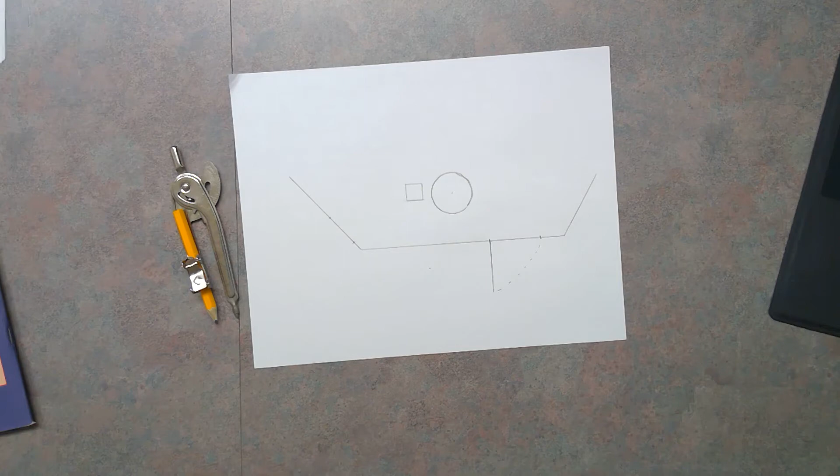All right, guys, I'm going to show you how to change your floor plan into a front view. So I'm going to go through really quick, just measure these things out. So I'm going to say that my wall is a 12-foot wall. You are going to draw this prettier than I am. This is just so that we can get through this video a little bit quicker.

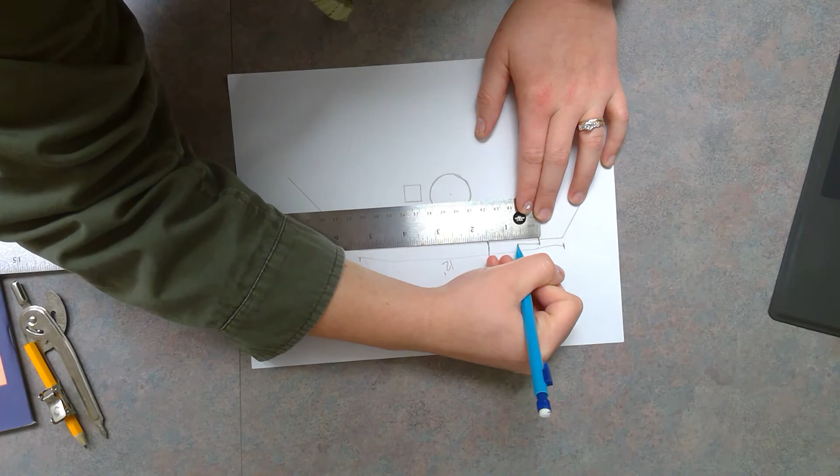Then my door is a 3-foot door. This wall is a 4-foot wall. Remember, I'm using 1/2-inch scale, so I'm doubling all my measurements. This wall is a 6-foot wall.

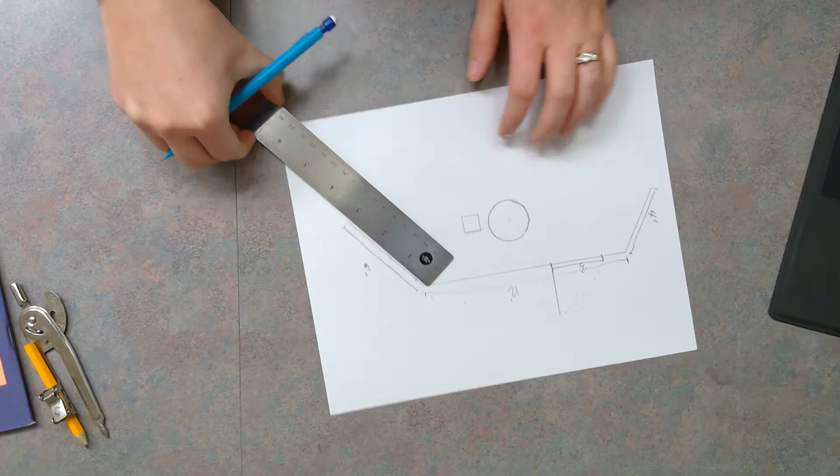This chair has a 1-foot measurement on each side. I know that because I just measured it. And my table, I'm going to round it a little bit, but I'm going to say that this is a 2-foot table, just to make it easy.

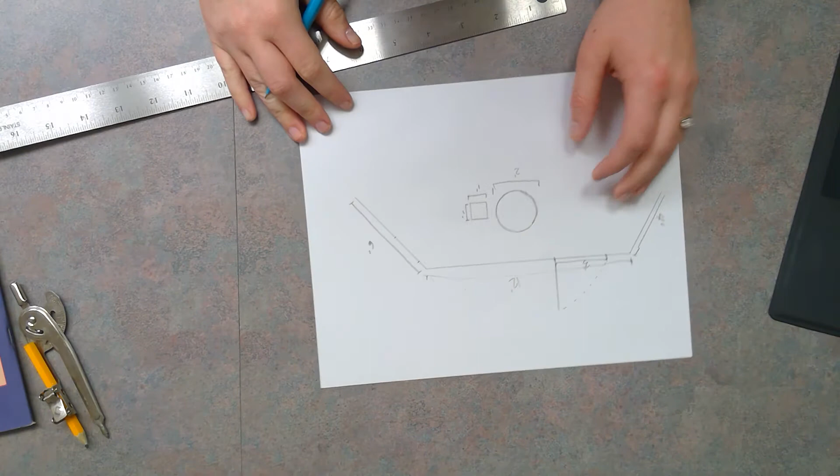So now that I have all of my measurements on this drawing, don't forget you're going to label your door too, but we already know that it's 3 feet. You are going to use these measurements to draw your front view. So you're always going to start with your back wall every single time. So on my front view, I've got a 12-foot wall, so I would just go towards the bottom of my paper and I would draw a 6-inch line.

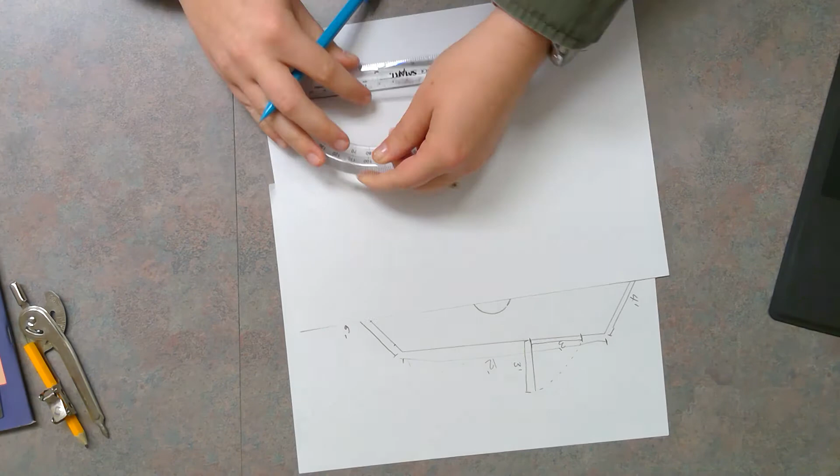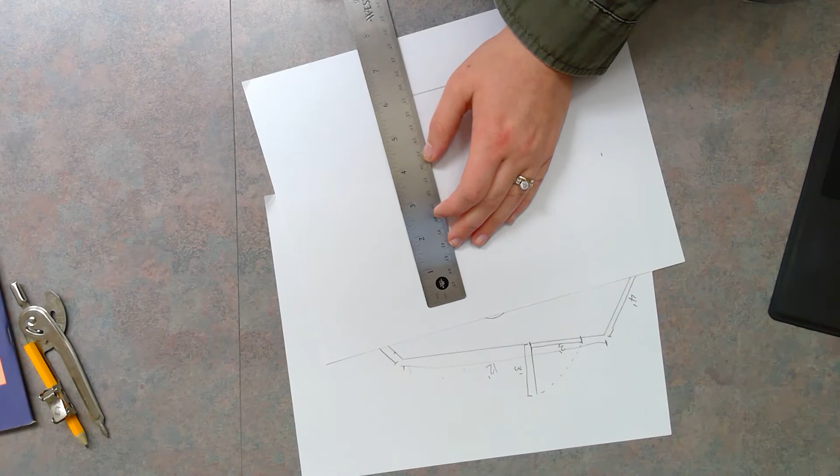Then I would use my protractor so that I could decide how tall I wanted this wall. I want it to be 90 degrees though, so I'm going to make my marks. 90-degree marks. Then I would want my wall to be, let's say, a 12-foot wall. So I would bring my 6 inches, because I'm doubling it, remember, 1/2-inch scale, and I would draw on either side. And this would be my 12-foot wall. So because my wall is 12 foot by 12 foot, this is going to end up being a square.

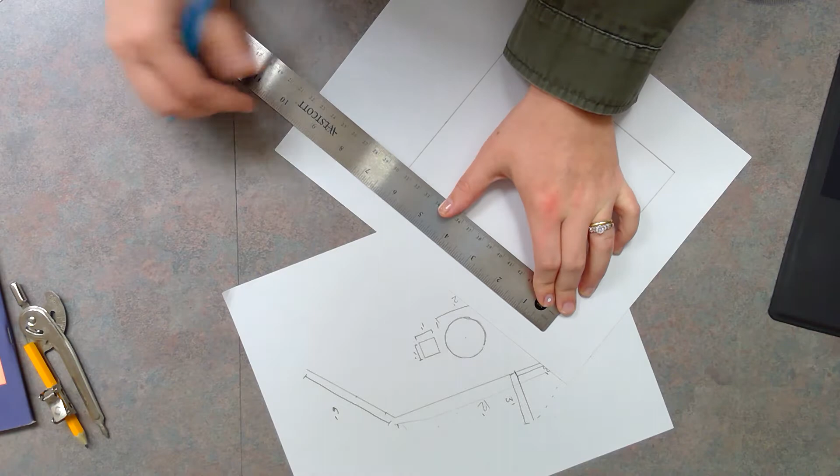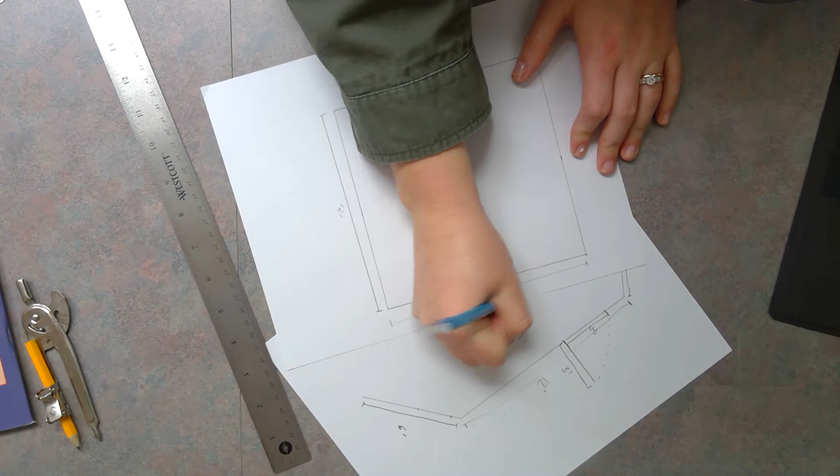Then I would label both of these. Remember, you're going to make it prettier than I am. I'm just going to go a little bit quick. 12 foot. 12 foot. Now, here comes a little bit of the tricky part. You always want to add anything that's on your back wall first. So the only thing that's on mine would be this door right here.

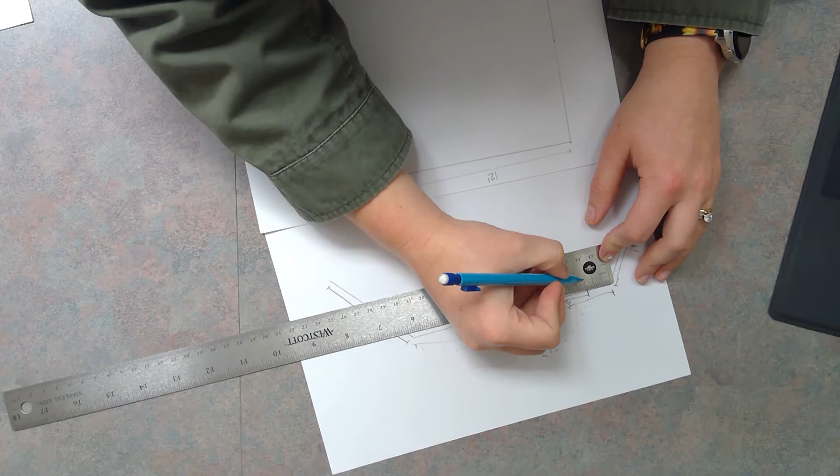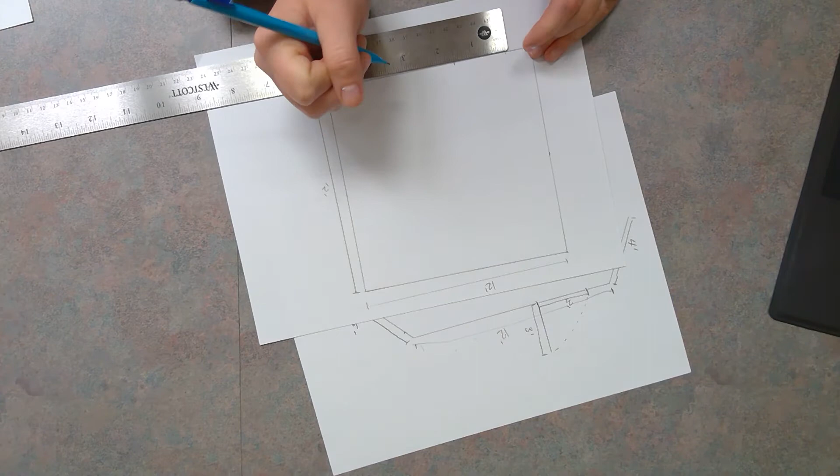And so on this door, I would measure from the side of this corner, so right here, and I would say that marks at my 3/4 inch mark. So I'm going to measure the same thing over here. I'm going to put a little mark. And I know that my door is 3 feet wide, so I'm going to put a mark at my 1.5 inch point. Now that I have my length figured out, I have to figure out how tall I want it to be. So I'm going to make my door a 6-foot door. And so I would just bring it here.

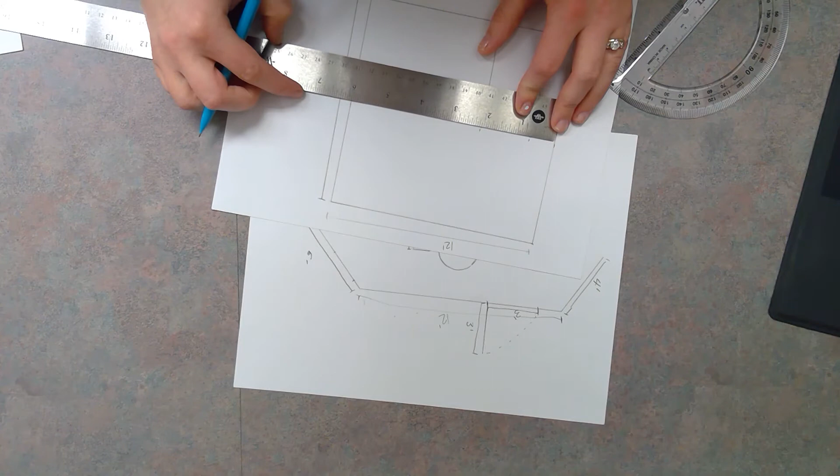Actually, I would use my protractor first, so I get the 90 degrees. 90 degrees. Then I would measure up 6 feet, which is 3 inches. Notice how I am kind of cutting a little bit of corners because I'm not actually connecting my dots. I'm just drawing up the 3 inches. You can do that if you feel confident, or you can extend your lines and then erase later. So I'm going to erase my 2 little dots that are my guidelines.

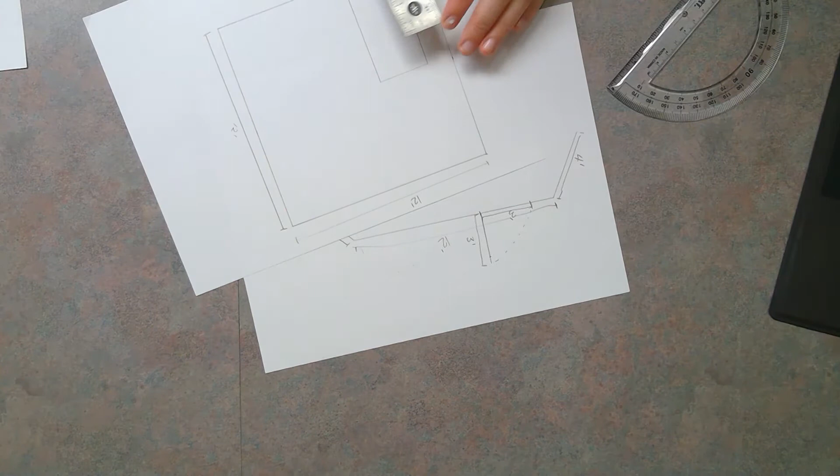Then I want to figure out how tall my doorknob is. Since my door swings out this way, it means that my doorknob is going to be right here. So I would want my doorknob to be about halfway up my door. So I'm going to put that at the 1.5 inch mark. And then for this, I'm not going to be super picky. You guys can just kind of color it in as a doorknob. And then there's my door.

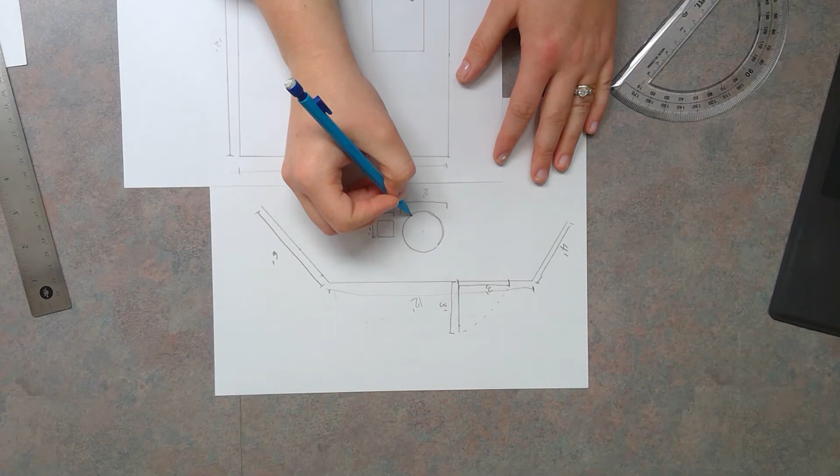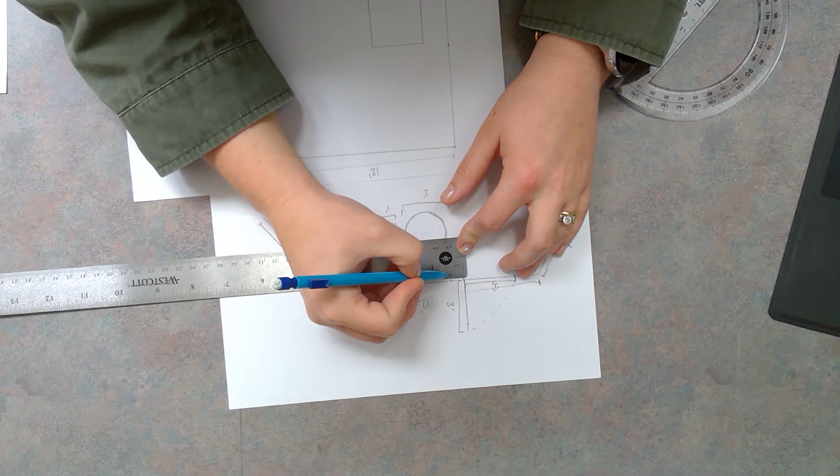Next, I would take this table and I would add that in on top of this drawing. So I would say, where on this wall does this table line up? You can just kind of eyeball it, but you're going to put a little bit of a mark so you can see. So that lines up to right here, which is just my 1, 2, 3, 4, 5, 6, 7, 8. 1, 2, 3. That's my 3/8 mark measurement. So from my door, I would put a mark at my 3/8 point. So my 3/8 point is here from the door.

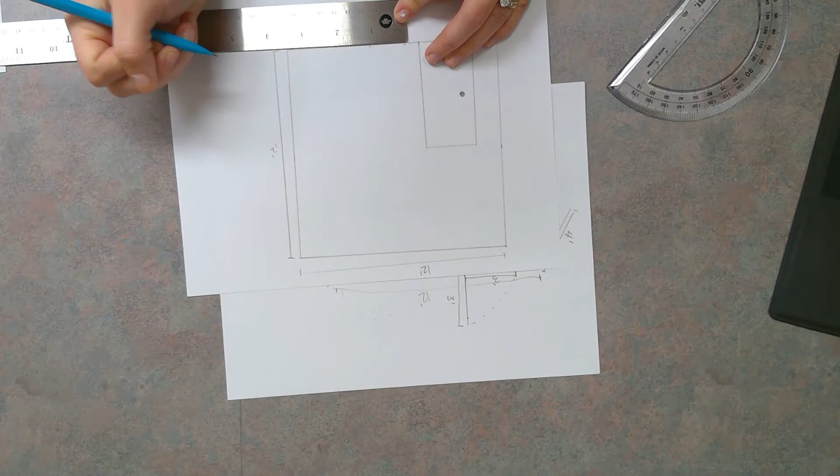Then I would remember that my table is 2 feet across, which means 1 inch across. And that's going to be how wide the circle part of my table is. I would want my table to just have one stand in the middle. So I would mark right here in the middle. And this is going to be what connects it to the ground. This is the stand that it's on.

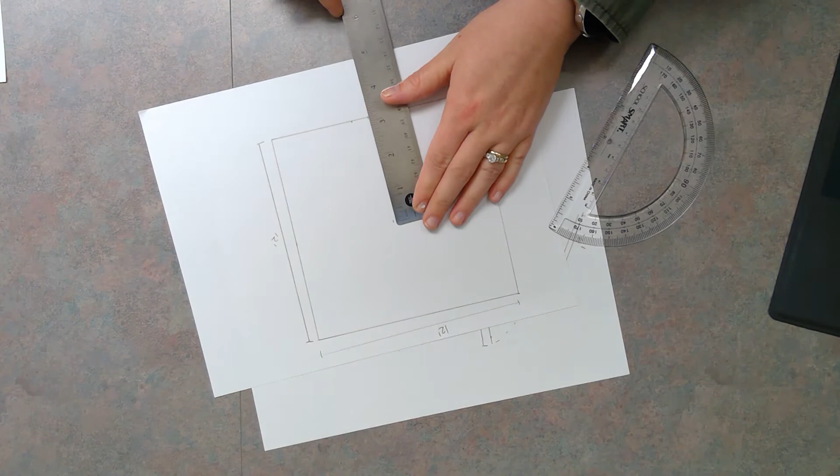So I would do my 90 degrees as always. I would decide how tall I want my table to be. For my table, I want it to be probably about, we'll say, 3 feet tall. So I would take my 1.5, go right here. This is now how tall my table is. And I can erase the rest of my line.

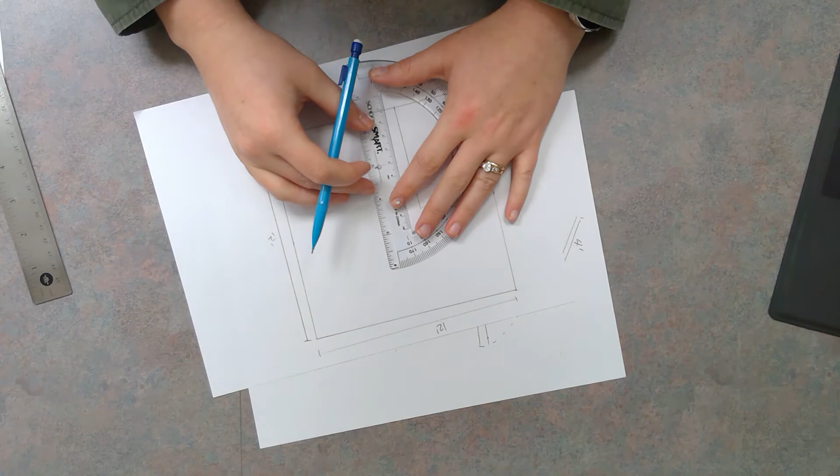Here's the part that gets a little bit tricky. You have to now just draw a line for where your table is. So I would want my table, like I said, to be about 1 inch wide. And so I would just draw my line here. And from the front, that's all we're gonna see of the table.

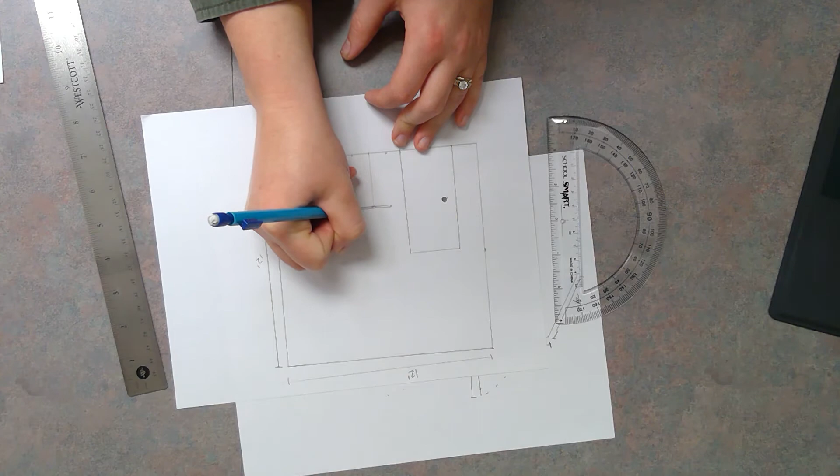If you wanted to, you could make it a little bit thicker so you can tell that it's actually a little thicker. You would do this with a ruler, you would not freehand. Same with this, you would do this with a ruler, you would not freehand. Or you can just leave it as that line. So that's gonna be a little tricky because from here we can tell it's a table, but from here it just looks like a T. It's because this is our top, this is our front.

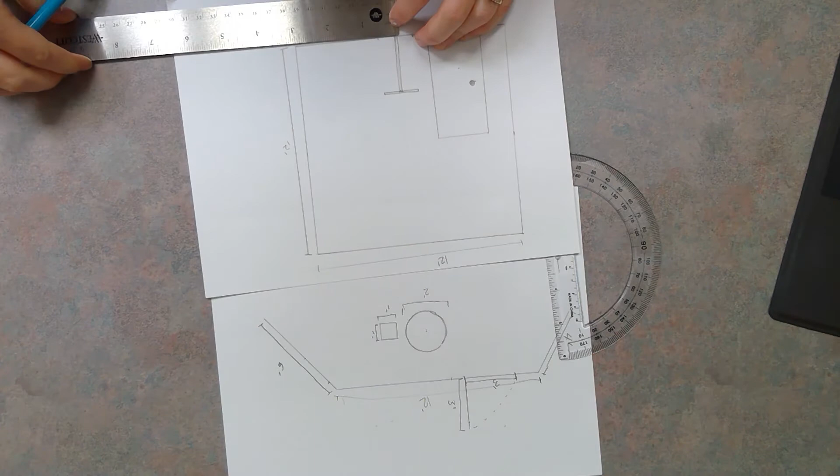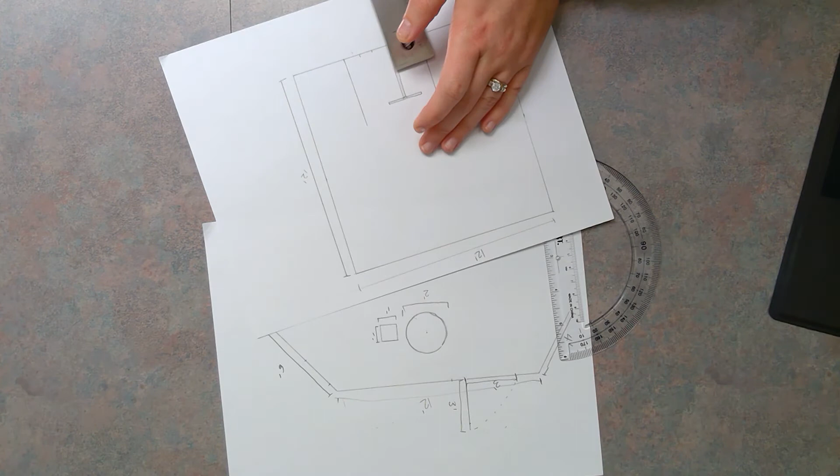Same with our chair. Our chair starts a little bit past our table. So we would take here, we would say our chair starts here. Our chair is 1 foot across, which means half an inch. I would want my chair to go up a little bit past my table. So I'm gonna put that at 4 feet for the back of the chair. And then for this, I would say I want it to go, let's say to about here. Remember, you will be using a protractor to do this.

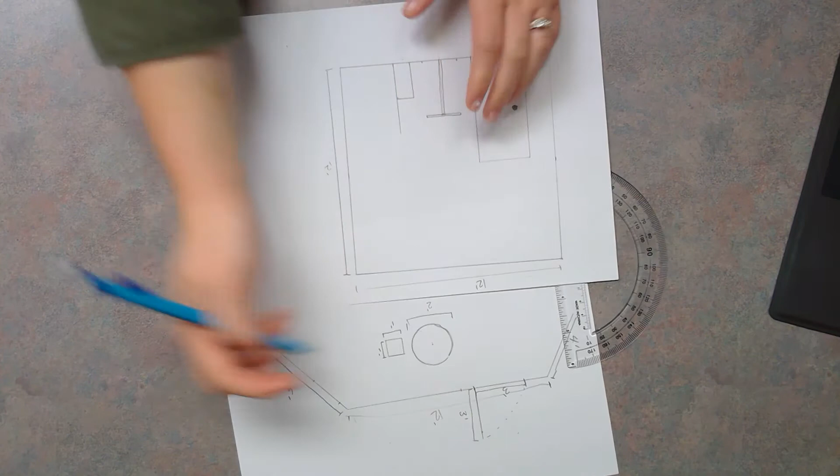And then I would connect my chair together. And again, that's all I see from the side of that chair. So that is my chair here. That is my chair here. So they are going to look a little different side by side.

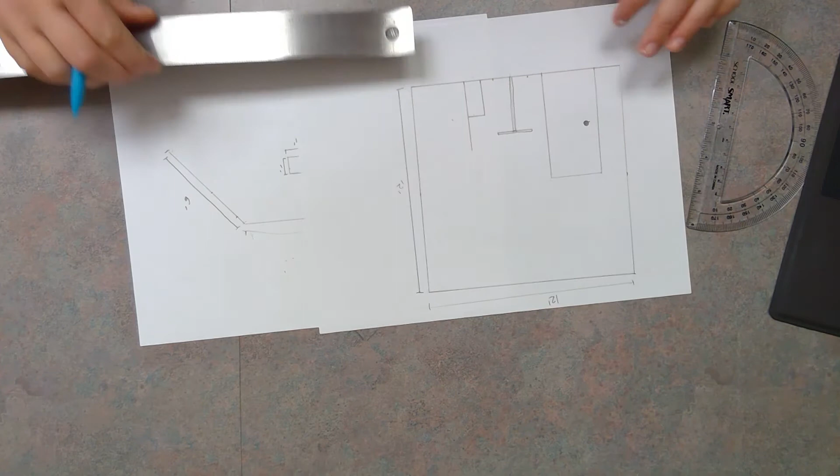Then either on this drawing or on the back of your other drawing, you're going to draw this line. This is your second wall. I'm going to go ahead and show you guys how to do it. If you draw it on the same drawing, you can also, like I said, draw it on the back of this drawing, and that would be fine with me. If you do it on the back, you're going to draw both of these two walls on the back and label them.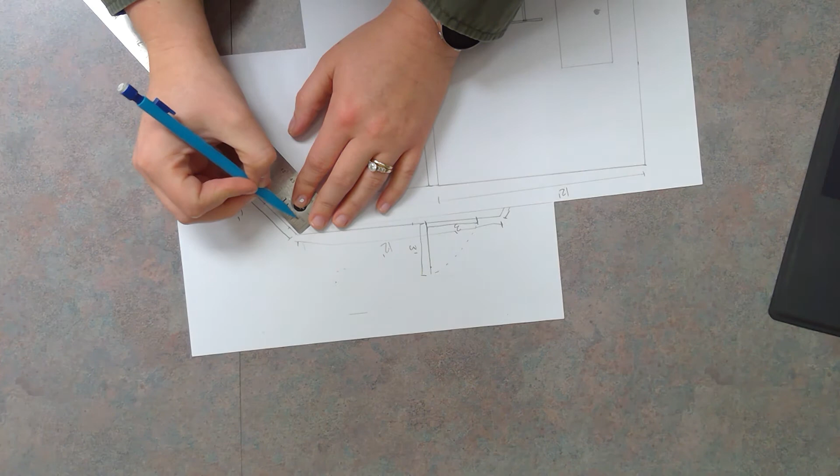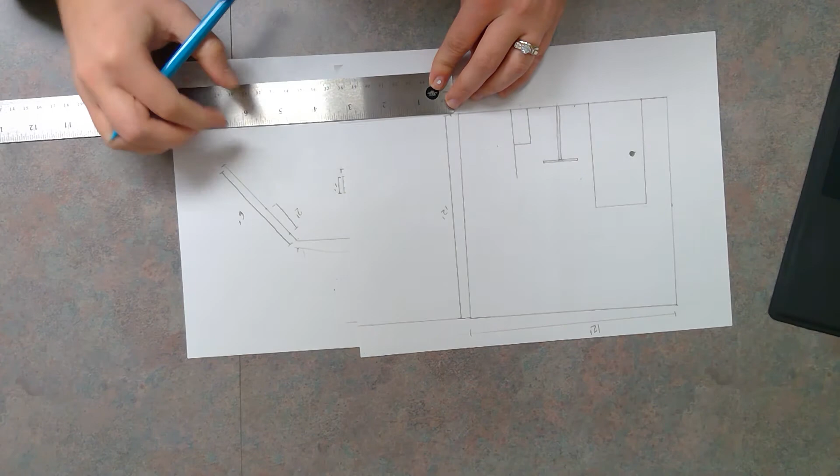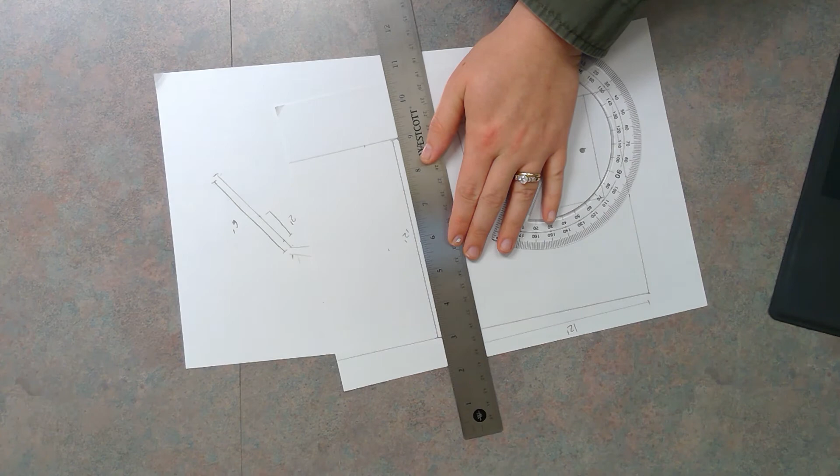So my window is pretty close to that wall. So that's just going to be about 1/4 inch away from the wall. So I would put my 1/4 inch here, and my window is, let's measure it, 2 feet across. So that means 1 inch. So we would put my 1 inch. And for windows, it's a little tricky because they don't actually touch the ground. So for a window, you are just going to want to do your 90-degree mark. 90 degree, and you just want to draw this really lightly. 90 degree. And this is just going to be your guide line for the edge of your windows.

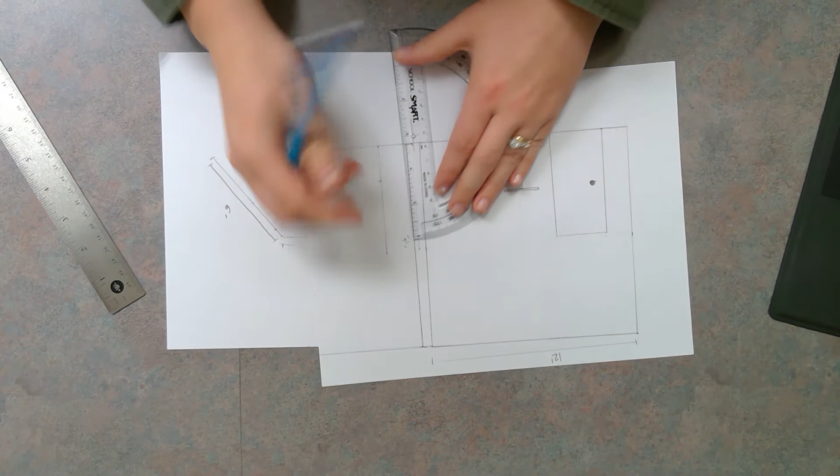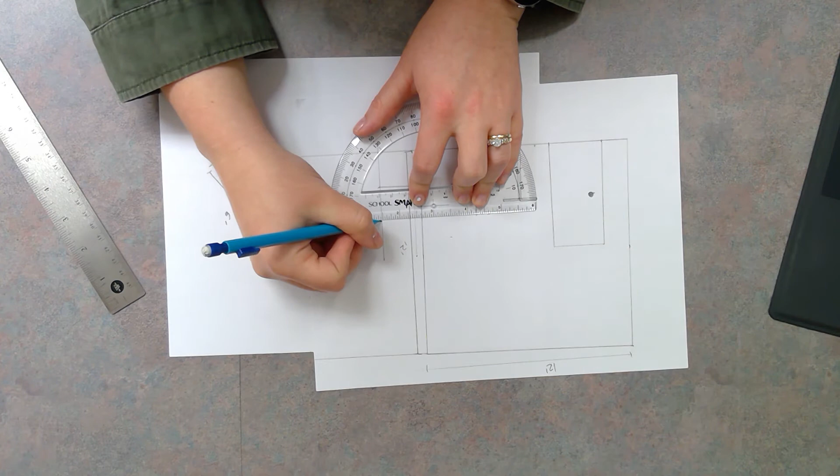So I would draw there. And then I would decide how far up off the ground I want my window to be. I want mine to be about 2 feet off the ground. So I'm going to mark mine at the 1 inch mark. Then my 90 degrees again. Draw and connect. Then I would want mine to be about 2 feet tall also. So I would put another mark on my 2 inch mark, 90 degrees, connect the two, and now I have my window drawn in, and I can erase those guidelines.

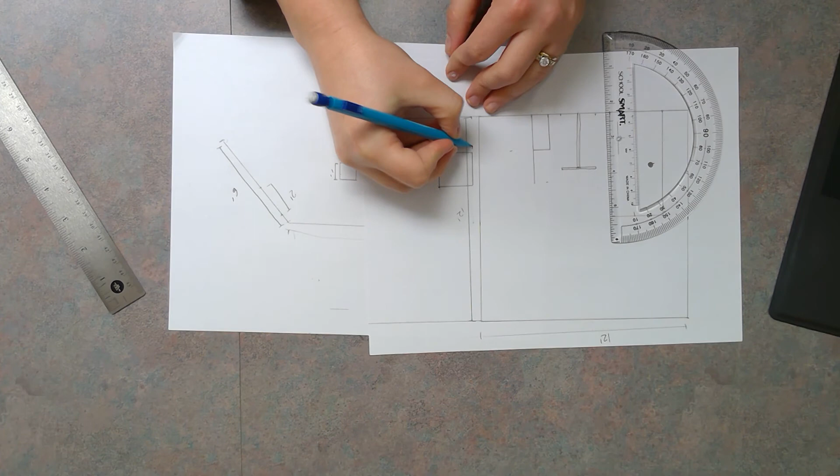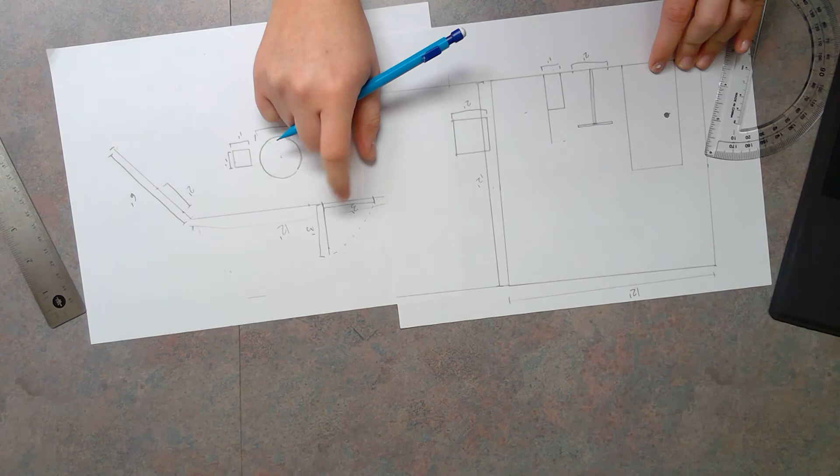So again, notice how on these two drawings, the windows look very different, but they are still the same exact length. So when I go to measure here, my 2 foot is going to line up with my 2 foot. Same with my chair. My 1 foot is going to line up with my 1 foot. And same with my table. My 2 foot is going to line up with my 2 foot. Same with my door. My 3 foot is going to line up with my 3 foot. And those are going to be in the same place on your walls.

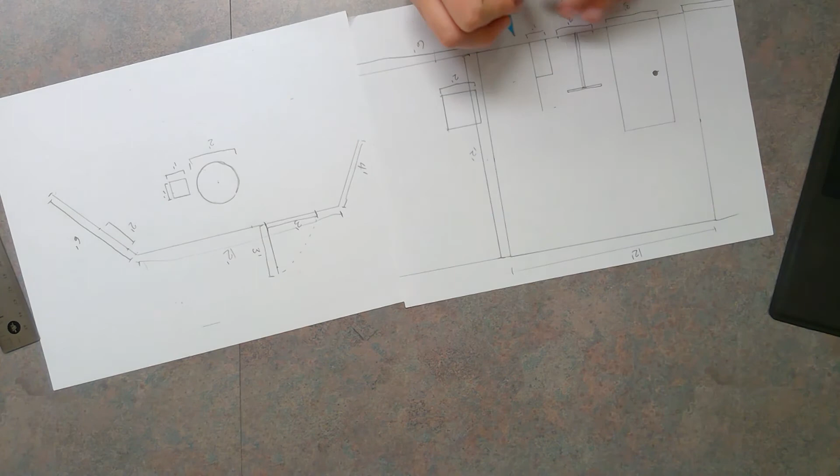Then you would label your walls. This one goes off the page, so I would have my line go off the page, say 6 foot. I would draw another wall over here. Same thing, it goes off the page, so I would just draw here, say 4 foot. Then I would label all of these things with how tall they are. Don't forget to label how tall everything is. So that would be 6 foot. That would be 3 foot.

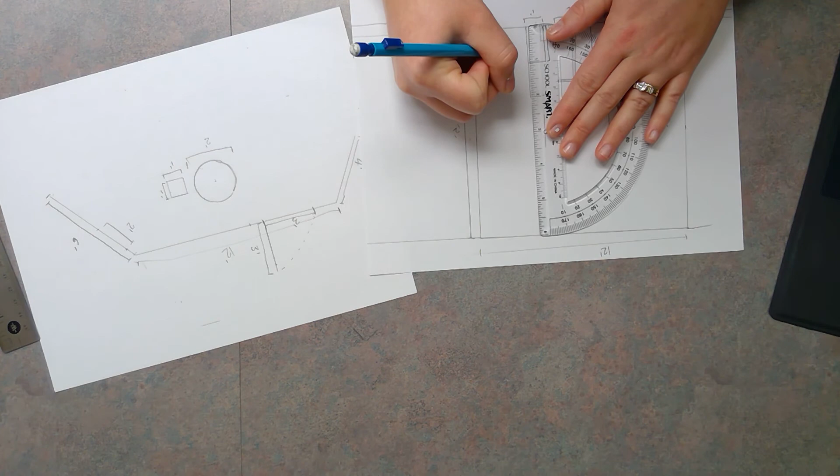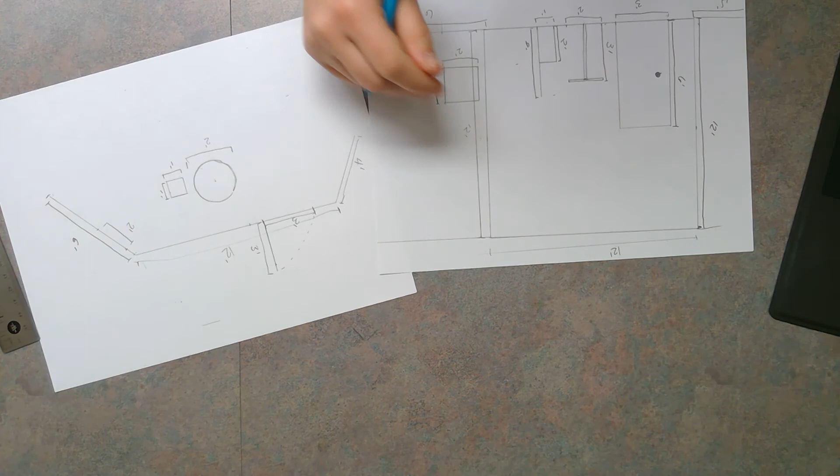This, you're going to label both of the chair. So you would go, that is 2 foot. That is 4 foot. And you also are going to label your walls. So you would say this is 12-foot wall. Label each of your walls. And then same with your window. Say that's a 2 foot. Again, you're going to draw those labels way more pretty than I just did, but for the sake of this video, I'm just going to do them quick.

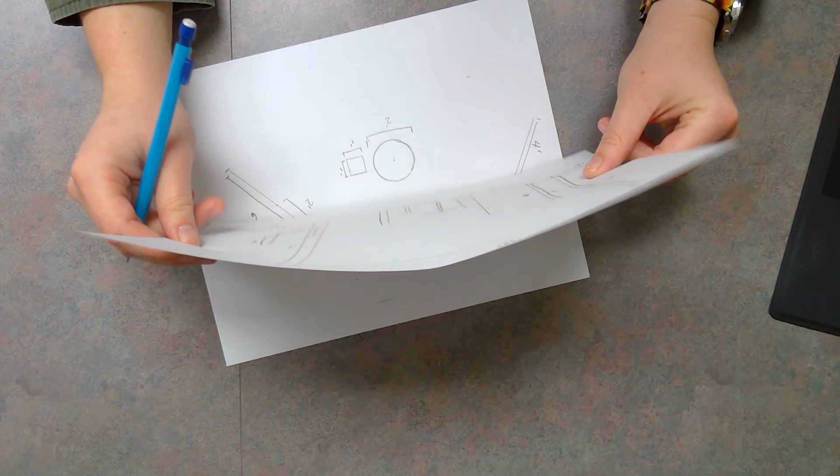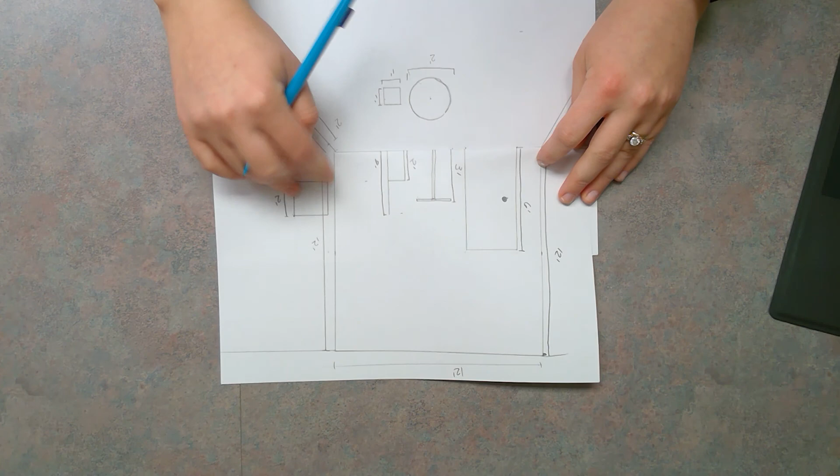So side by side, these drawings would look something like this. So whenever I go and I add them together, I'm going to add my front view like this, and then that's going to become my model. But it's important that your lines line up with each other so that when you create that model, everything is in the right spot. So if I were to fold it and put my top view and my front view together, those lines are in the exact same spot for my walls. Then I can just stand it up, and now my wall is created.